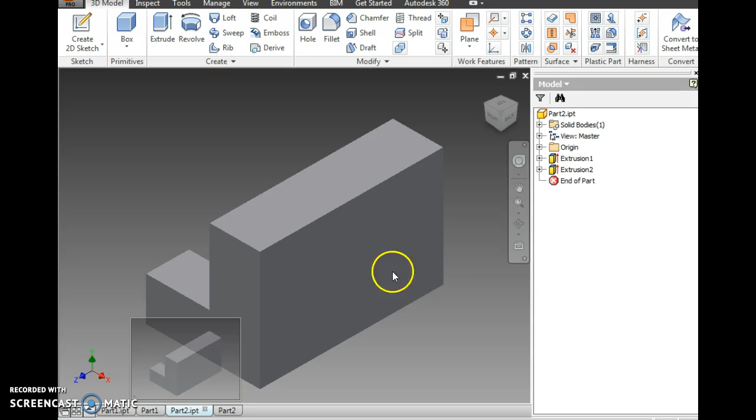Okay, 7th graders, here's where we left off the other day. We were looking at the matching worksheet where we were matching isometrics to orthographic projection. And what you see on the screen right now is the example for number 2. So if I click over here on part 2 and I swing that around, you see the 3D model, and then you also see it in the presentation drawing.

Now what I showed you last time was how to switch out your views so that you could change your front view to something you selected versus where you actually had drawn the front view as a 2D sketch. I will look at number 3, and then if time allows, I will go on to number 4 as well. And maybe we'll look at adding some measurements to these, and then some dimensions and some annotations, so we learn a little bit more about this program as we're working through things.

So let's look at number 3 right here. Again, we're going to have that similar feature of a block letter L that's extruded out, and then we'll make a couple of cuts in it so that we can try and match it up with what's on the right column here in orthographic projection. So this is what we're looking at right here. We're going to create that in Autodesk Inventor. We're going to convert it into a presentation drawing, and then we will try and match it up precisely on our worksheet.

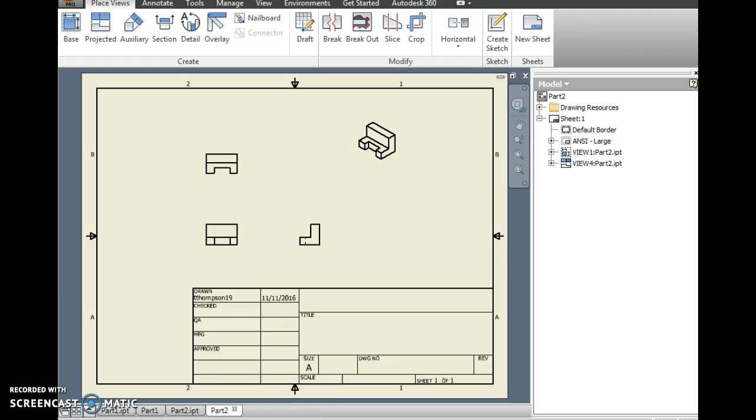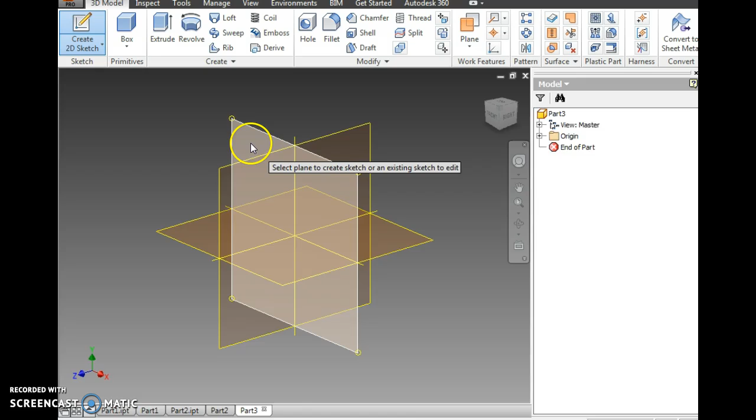So I'm going to go back to Inventor, and I'm going to go New, Standard IPT, Create. Let's try something a little different today. Let's look at things kind of as we did with our cube. So we have some precise measurements, and then we'll cut some things out. So I'm going to click on the pencil. I'm going to click on the front plane. And instead of making a block letter L, I'm going to start with a rectangle like I did for my dice. And I'm going to go 1, tab 1, enter.

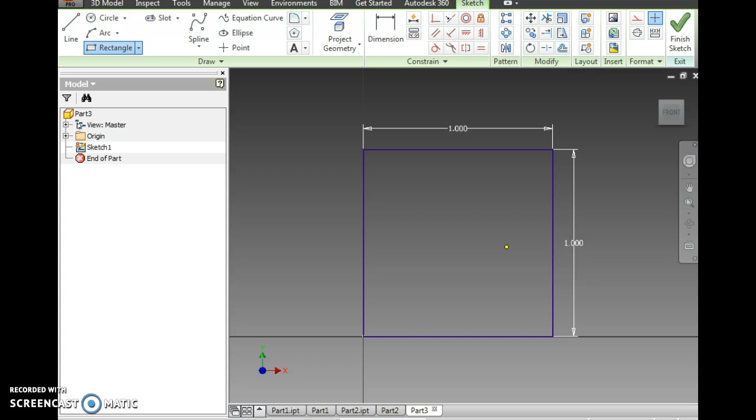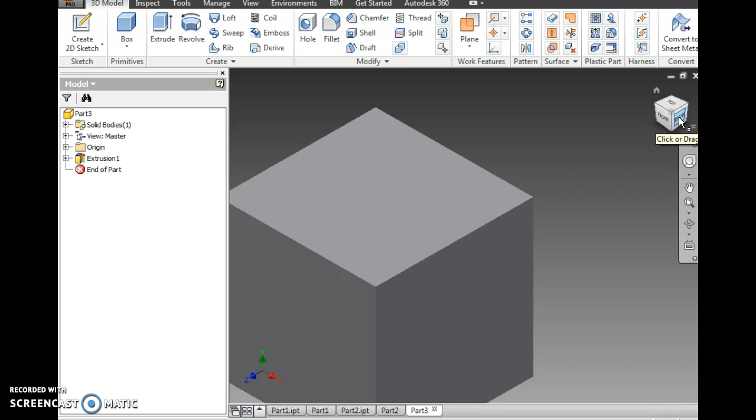Let me drag my browser over to this side. That's pretty traditional. Click on the front. I'm going to go finish sketch. Little house on the view cube. And I'm going to extrude that to 1 inch. Okay. Again, let's take a different approach here than we did the other day. Let's go with the right side view. That's where we're going to put our block letter L in.

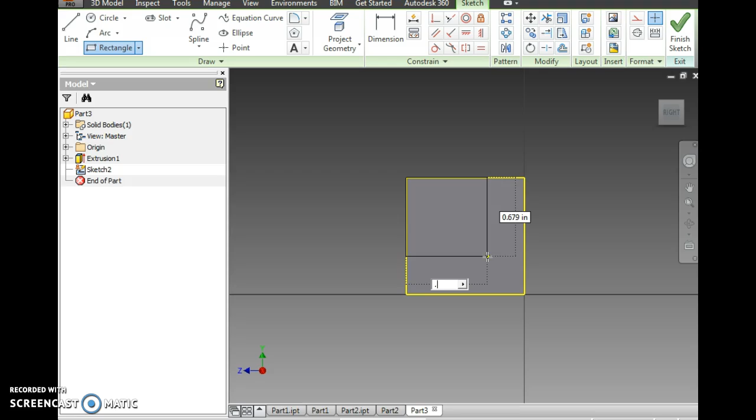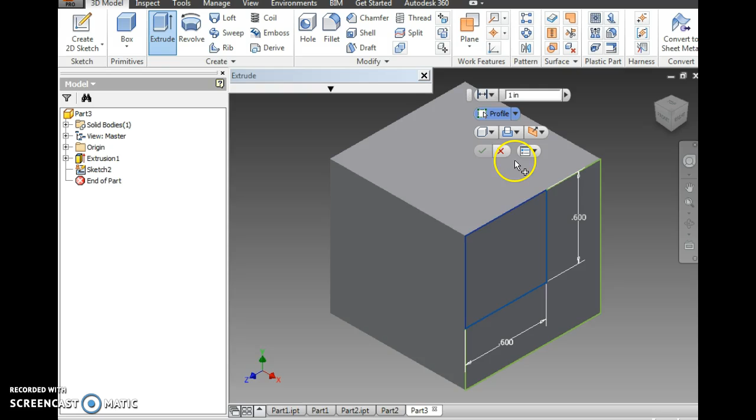So we're going to click on the pencil. We're going to click on our right side here. Let's use a rectangle. And let's make that measurement 0.6, tab 0.6, enter. Let's go finish sketch. Little house. We'll go to extrude. And we've learned how to extrude cuts. So let's extrude this as a cut. There we have our block letter L.

Now what I like about this is when I click on the front view, that's the profile, the front view I want. And when I click on the right view, that's the profile, the right view I want based upon what we have on that handout. Let's look at number 3 on our handout again. Whoops, wrong handout. There we go. All right, we have the same cutout here in this area, and then we have a slice off the back. So let's do what we're used to first.

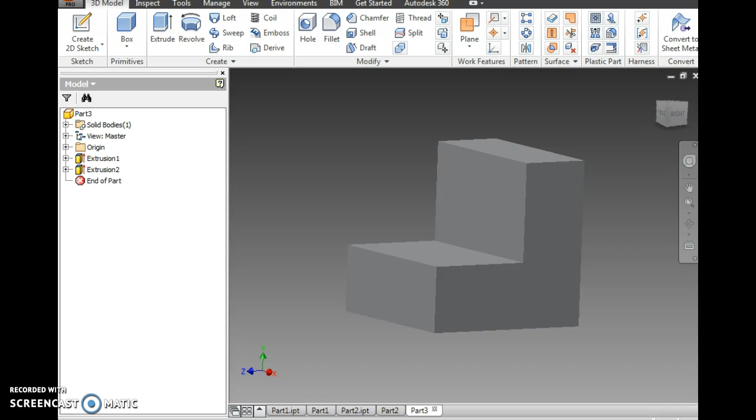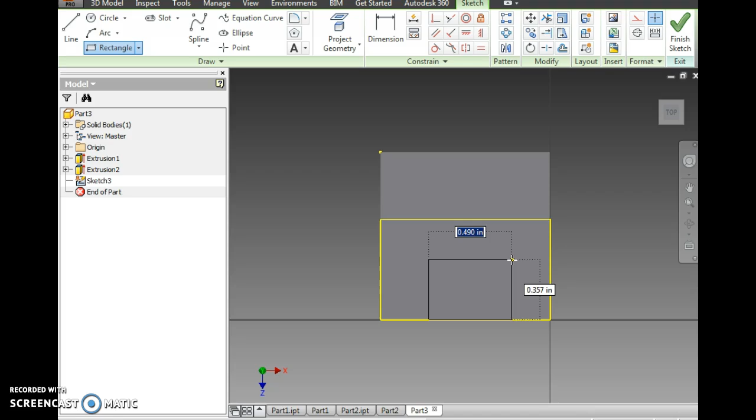So I'm going to cut the center out here. I'm going to notch that. So I'm going to click on the pencil, and I'm going to click where I'm going to notch that. And I'm going to use rectangle. Let's look at what we have here. Maybe we can work in some precise measurements. So if this is 1 long, let's do this. Let's make our rectangle. Let's go and dimension it.

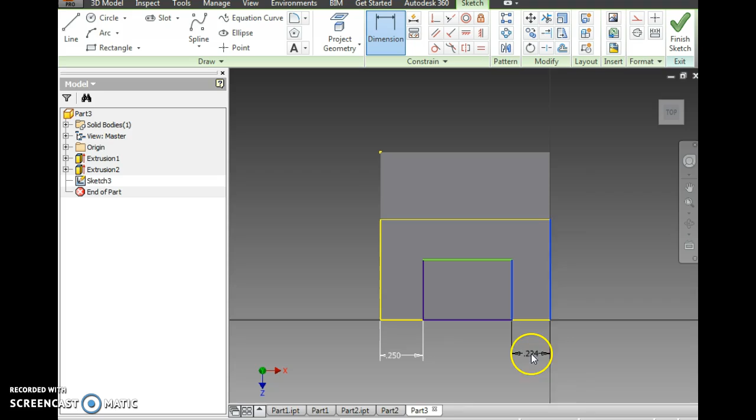So I'm going to dimension it so that it is 1/2 inch. Let's do 0.25, 1/4 inch here. And let's do a 1/4 inch on this side. That means the middle is going to be 1/2 inch. Let's see what this dimension is. 0.357. Let's make this 3/8. Let's see what it looks like.

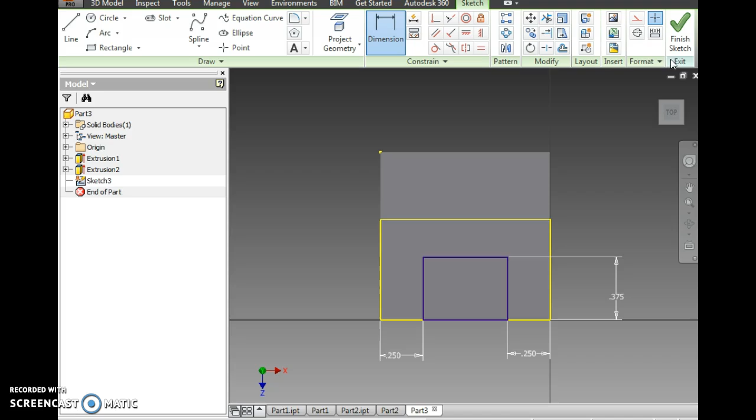All right. I like that because we might go into our presentation drawing and annotate it with some dimensions. Annotating means we're adding some notes, and it'll have some measurements in there, so it kind of makes sense. Let's go extrude. We're going to extrude this as a cut.

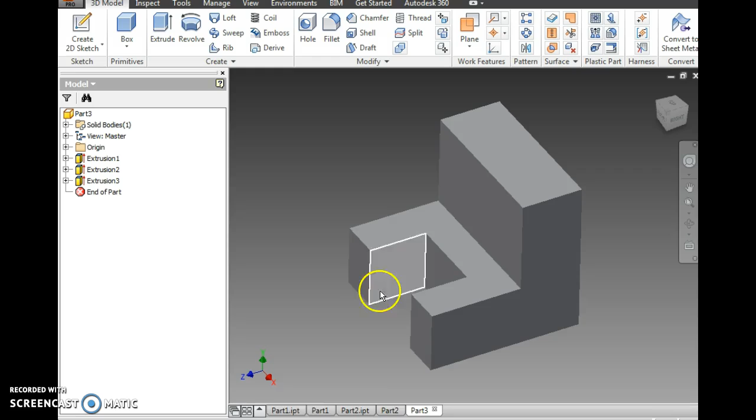All right. Now going back to our handout, we have a slice off the back there. And I'd say it looks like a third of it's missing. So that's what we're going to do. Let's go back to Inventor. We're going to take out a third of it here.

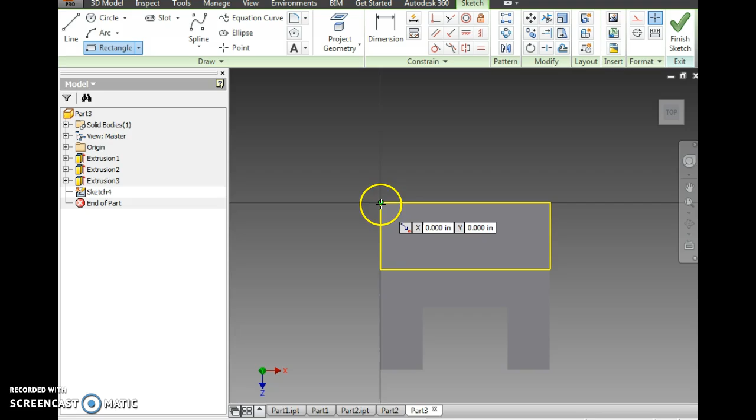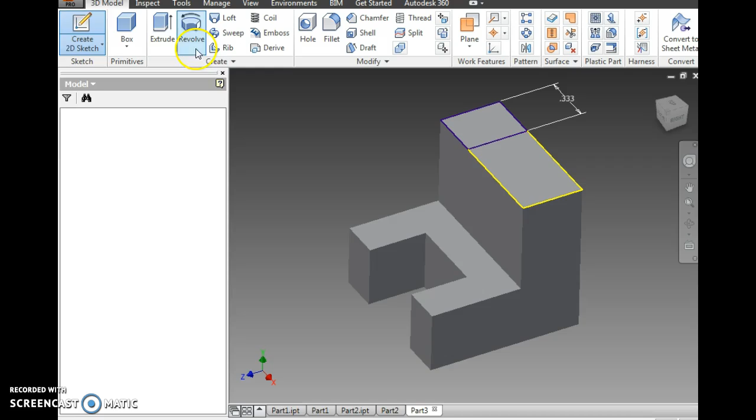We're going to click on the pencil. Click where we're going to cut that out. We're going to use rectangle. And I'm just going to do corner to corner first. But then I'm going to go over here to dimension. And from this distance across, I'm going to make this 1/3. So we're actually taking out a third of that. Finish sketch. And then we'll extrude this as a cut.

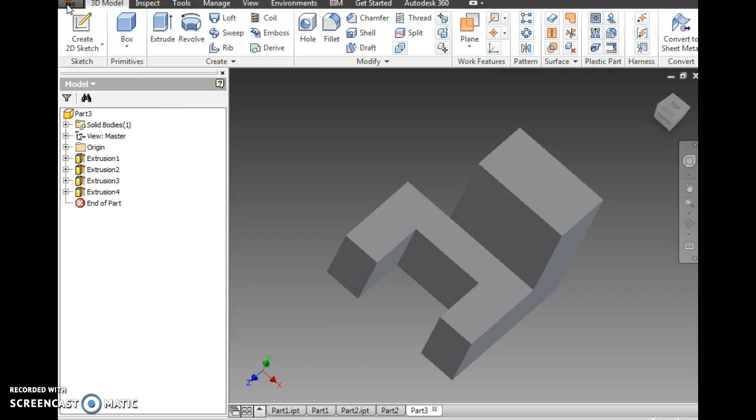All right, so here's our object here. Looks pretty good so far. We're going to save this as part 3. So I'm going to go save as. Part 3, IPT. Saving it in my folder. I'm going to replace an older part 3 that I've had, so I don't have too many files jumping up.

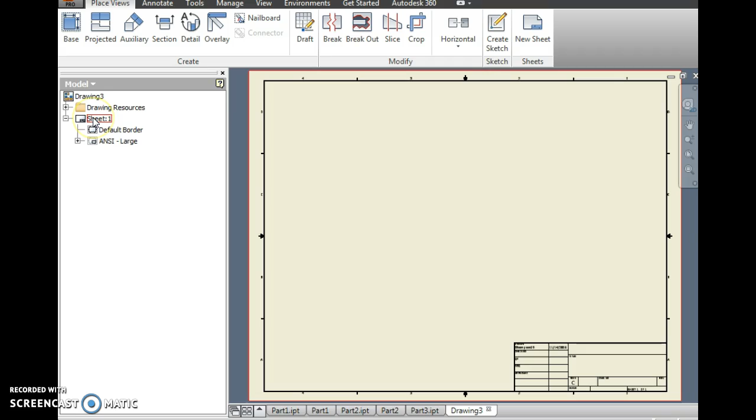Now we can go New, Standard IDW, and Create. I should already have the front view I want because that's how I set it up. I do have my browser menu open. I showed you how to open that if you had lost it. And so here I'm going to right-click on Sheet, and I'm going to edit Sheet.

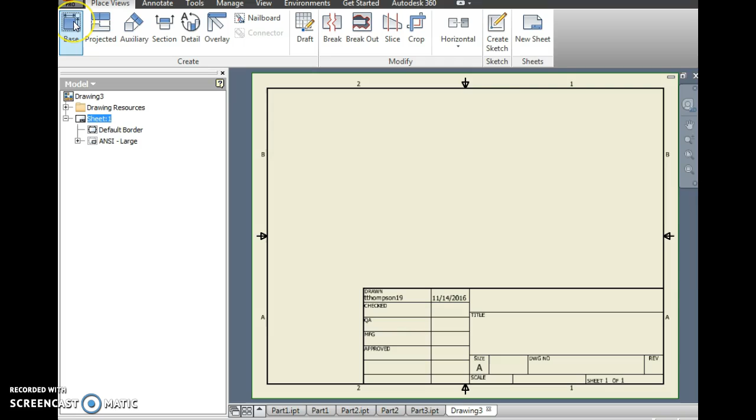Because our printer does 8.5 by 11, and this defaults to a sheet size of C, which is 17 by 22. I'm going to switch that to A. Now we have 8.5 by 11. And I'll click OK. Let's go to Base and see what our sizes look like. That looks like it's going to work fine. So let's drag our control box out of the way.

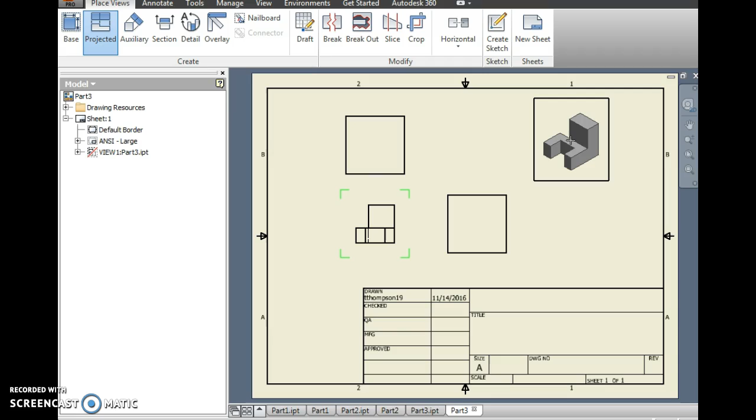So I'm going to click in my front view. I'm going to click in my top view. I'm going to go to my right side view. I'm going to click a 4th time up here for my isometric. And I'm going to right click to create my working drawing.

Let's see how close that is to what we did on our matching exercises. I do see some hidden lines here. I'm wondering if those are going to be an issue. So we go to matching. And let's try and figure out what the closest one is going to be. Looks like it's going to be letter F.

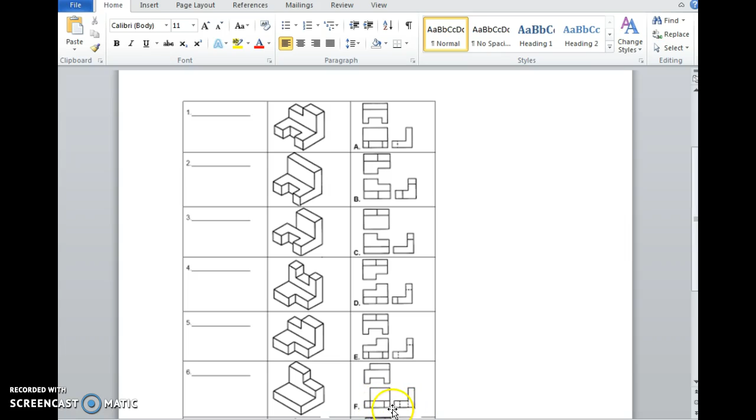It does have the 2 hidden lines there. Mine are very similar to that, but I believe that it doesn't show up on one of those. So it's pretty accurate. It's not totally accurate because we weren't looking at any set measurements on the matching worksheet.

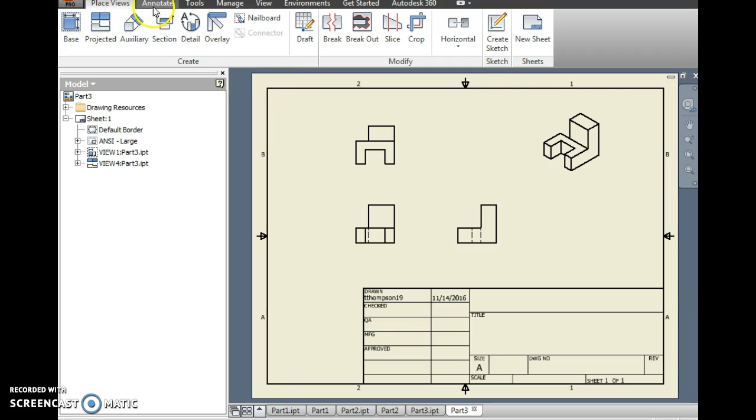One thing that I wanted to show you, though, because we'll be using this in other activities, is the annotations. I wanted to get you familiar with those. If I go up here to Annotate, and I go over here to Dimension, you're going to find out that this looks a lot like what you've used in 2D Sketch. I'm going to place these dimensions between the views.

I'm going to click OK. Point to point. I'm going to drag that down. And we don't want the dimensions set up on top of each other, but we want them between the views. Click OK there as well. Click this point to that point, and keep those between the views. Now we have overall length. If you added up those decimals, that would give you 1 inch.

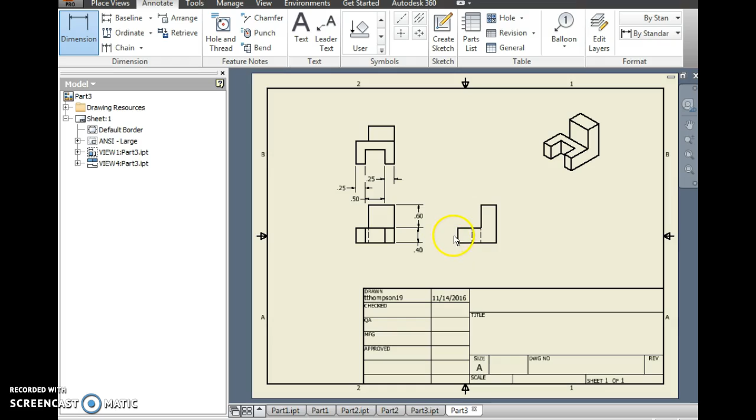Remember that? Let's go this point to here. That's going to be 0.40. So what do you think this one's going to be from here to here? If you guessed 0.6, you were right. Let's do just a couple more. Let's do from here to there for our width. And the last one here should give us 0.4. Now you'll see in most instances I place those dimensions between the views.

I try not to repeat any. This is for width and this is for height. Even though they look like they're repeating, it's 2 different dimensions, width and height. However, if you remember, I started this out as a 1x1 cube. So that's how those things added up.

So I hope you found this video informational for number 3. I hope it helps you out with those matching exercises. And also, it should get you familiar with annotating with dimensions. That's going to be important when we start doing some of our bigger projects like the pegboard toy and the candy dispenser that we'll make in the wood shop.